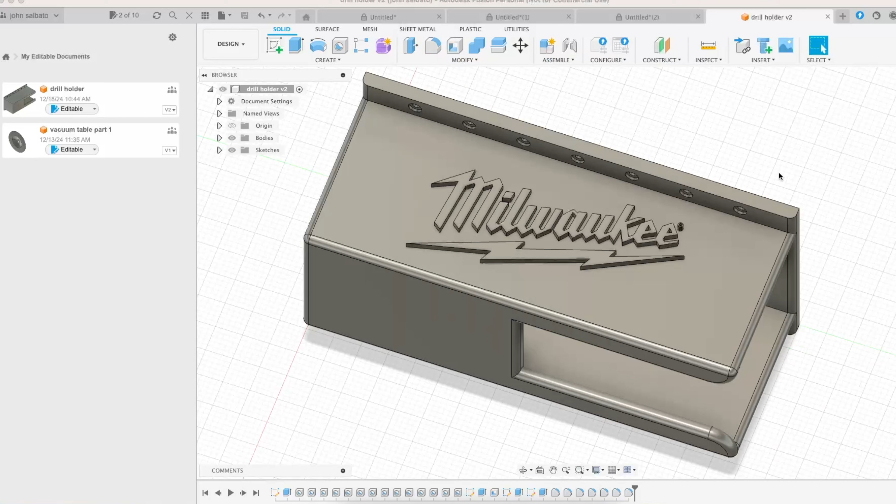Welcome to Outlaw Woodworking. Today we're going to review Bambu Lab's 3D printer. I recently purchased the Bambu Lab X1 Carbon with the AMS, and I'm going to attempt to make a Milwaukee drill holder that you see in this picture right here. We're going to do it using Fusion 360. This video is for entertainment purposes only. I'm not an expert on Fusion 360, but I am going to show you how easy it is to do.

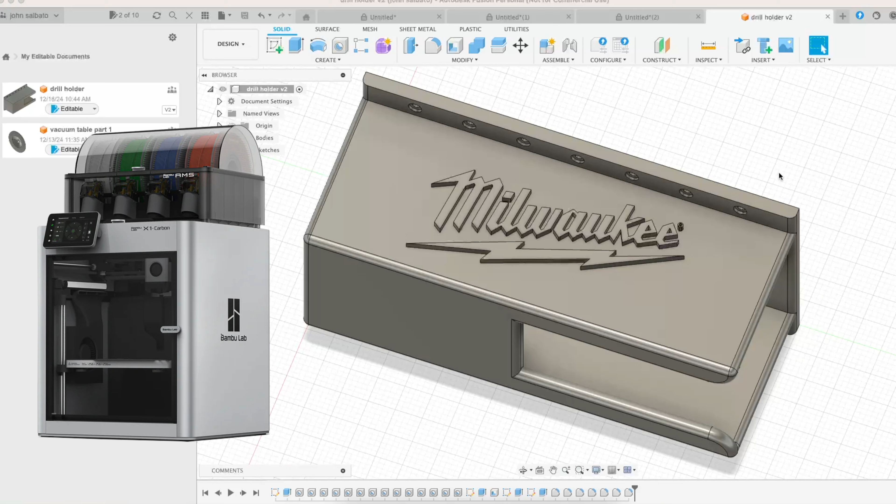So basically I drew this in the morning and printed it in the afternoon, and I'm going to take you through step by step. We'll start off with Fusion 360, drawing it. Then we'll take and save it and bring it into Bambu Studio, slice it, and then send it to the printer. I'll take you along for the ride.

There he goes, it's a working man. He's trying to make a living any way he can. And he'll break his back for a dollar or two. Oh, there ain't no shame in what he do.

Okay, here we are in Fusion 360, and we're going to start our project. We're going to go ahead and go up here, start from the side. The first thing we're going to do is create a rectangle.

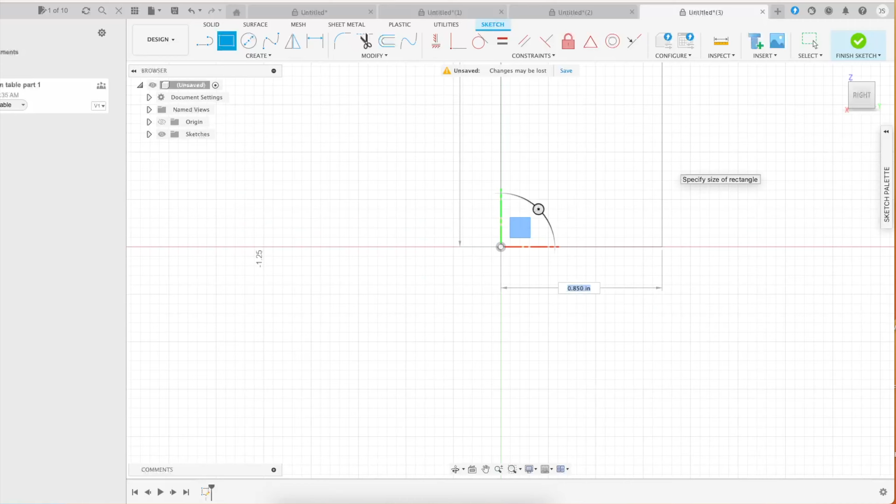I'm going to start right from the center. We're going to go 4 inches, hit tab, and then go 8 inches. Enter. And there's our rectangle. So that's basically the start of our project right here.

Now the first thing we need to do is our holes, because they're the hardest part. So we're going to create a line just so we know where the quarter inch mark is. We'll go down here and create a line at 0.25. Hit enter. There's one line right there.

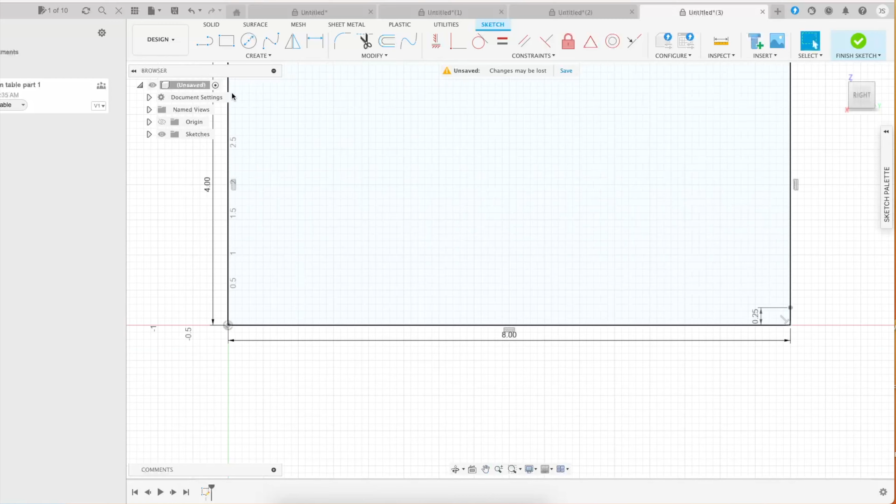Now we know, so we're going to go ahead and create a line all the way across there, right at 0.25. Okay, there's our control line for our first row of holes.

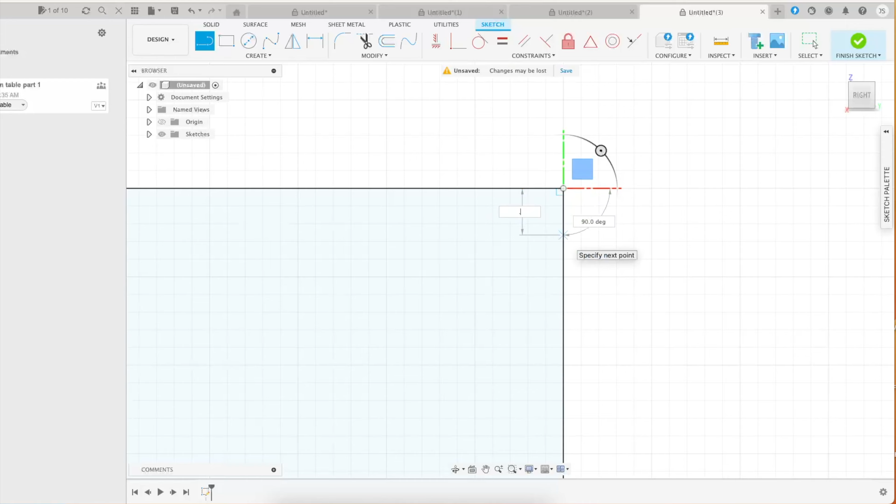We're going to have holes on each side, so we're going to do the same thing up here on this side. We'll go ahead and create a line at 0.25. Hit enter. And then we're going to make a mark all the way across. This will basically tell me where to put these holes at. Okay, there's our two control lines.

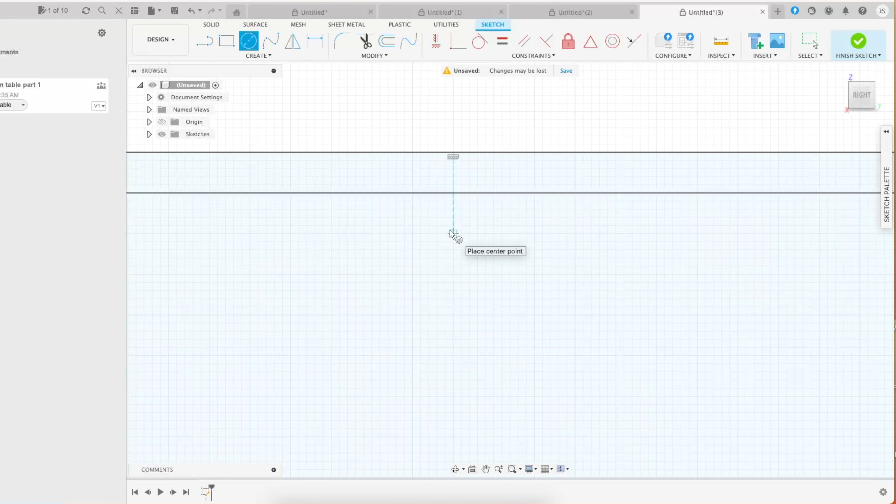Now what we want to do is draw some holes. So we need to draw a hole, and we'll go ahead and start in the center of this thing right here, 0.125, which is 1/8 an inch, and that'll be our first hole.

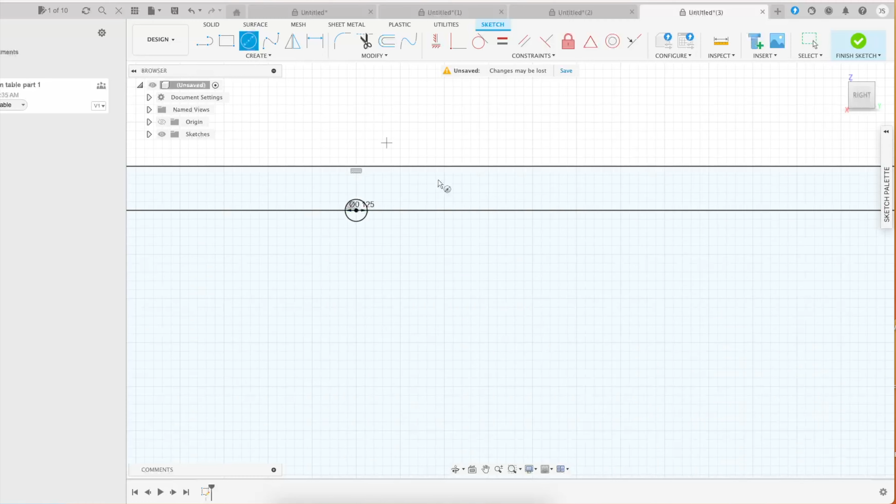Now we're going to do these holes like every... let's see, that's a quarter inch, so half inch. We're going to do them about every inch. So we'll go ahead and put another hole here. Same thing, 0.125. Hit enter. And then we'll go ahead and put another one.

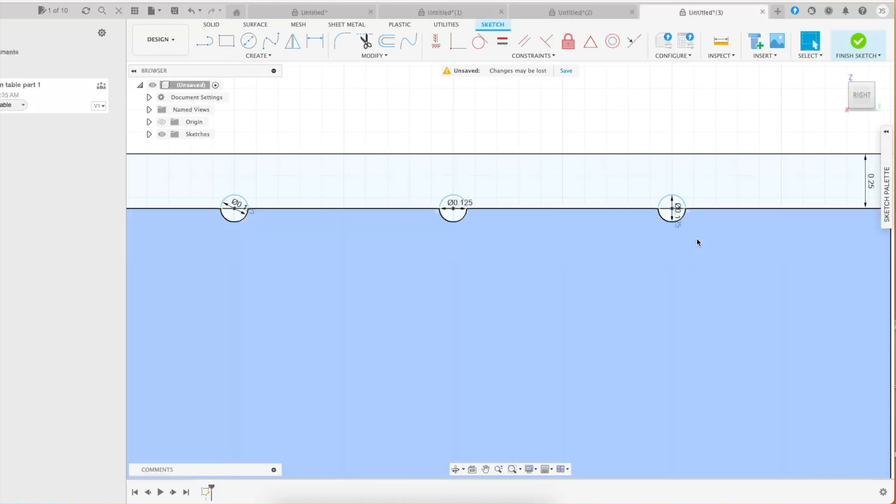Let's see, right there. 0.125. Hit enter. Go ahead and do another one. Let's see, right there. 0.125. Gets a little tedious making these holes actually, the holes are actually the hardest part. Let's see, that's pretty good right there.

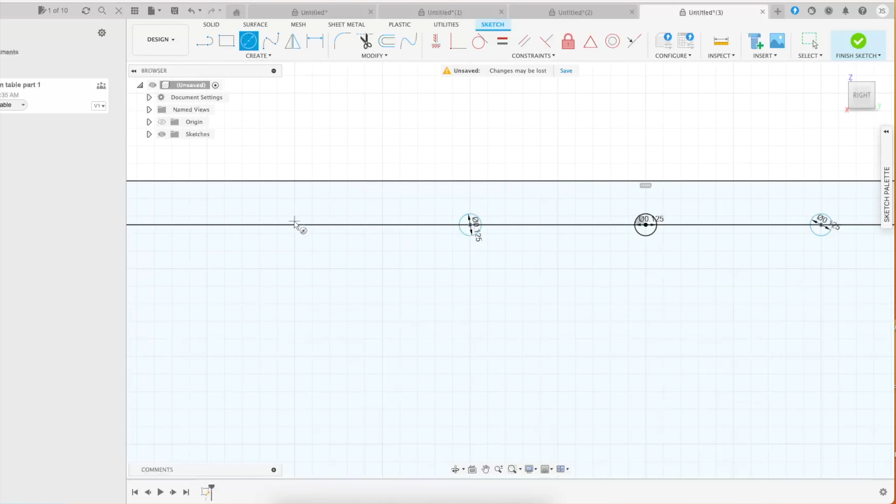So let's go the other way. 0.125. Create another hole. 0.125. And 0.125. Okay.

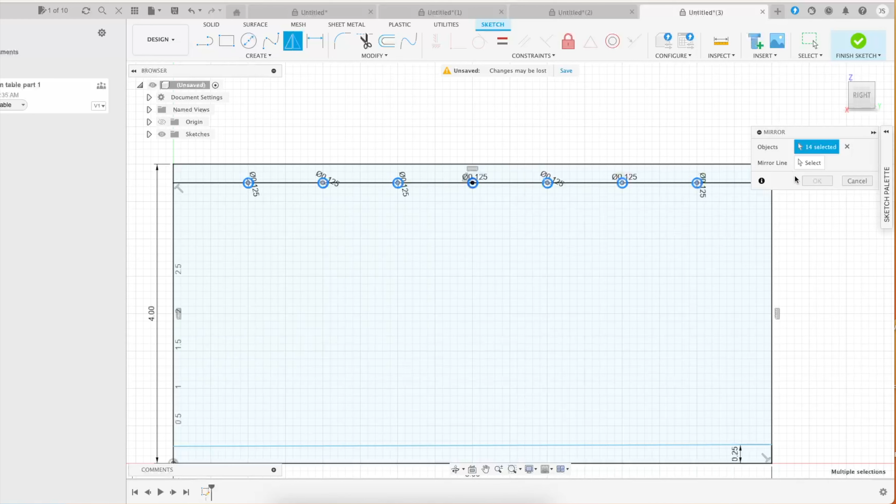Now we should be able to just array this across the thing. So we're going to try that. Let's circle these holes. So we've selected those holes. Now we're going to go up here to mirror. 14 selected. That did not work.

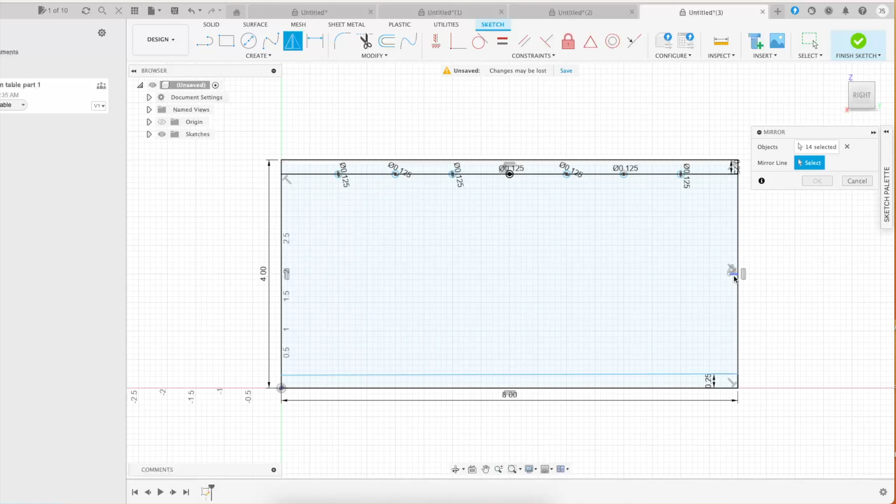So we need a center line before we can do that. So we would go here, pick the center, and now let's select all those holes. Go up here to mirror. 14 selected. Now we're going to select the line. There we go. You can see it mirrored it all on the other side.

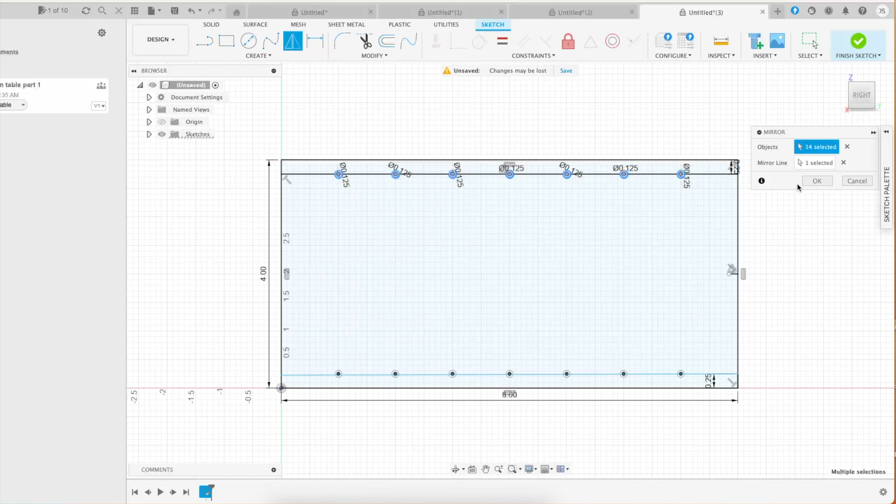Okay, now we're going to, oops, what happened there? Select line, select objects, and hit OK. Okay, now they're all there. Okay, so we have all the holes there.

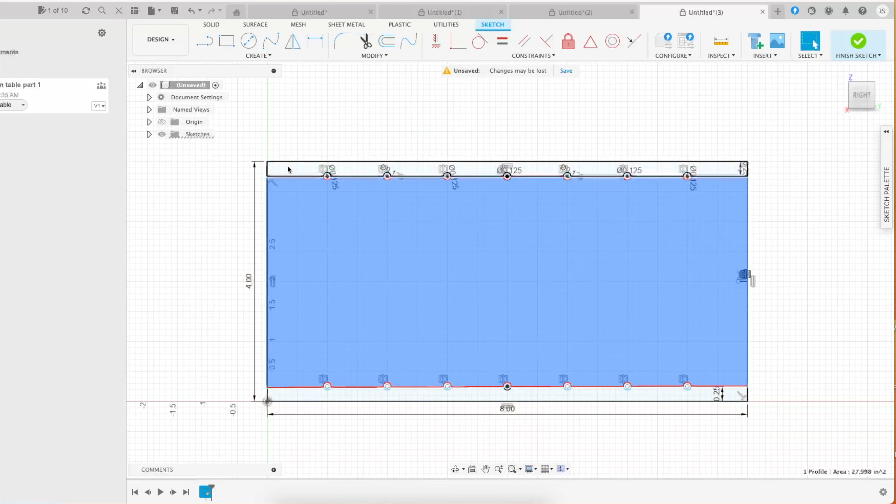Now what we need to do, we're going to extrude this whole thing. Actually, what I want to do is extrude just the base. Let's get rid of this line. Get rid of this line. We're going to get rid of these two control lines. Now we have one solid base.

We're going to go ahead and go up here to solid and extrude. The thickness of our material is 1/4 inch, so we'll put 0.25 and hit OK. So now when we look at this, you can see it's got the holes in it, and that's our whole base at the right thickness.

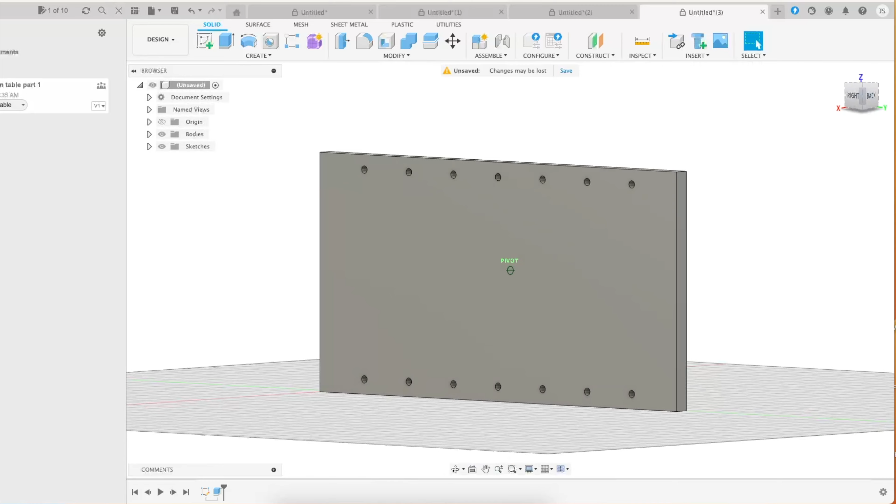Okay, next thing we want to do to these holes is basically, these are in the center of each of these things.

Now what I want to do is multiple holes, but we're going to do this little counterbore. I'm going to select that, and now we're going to do a counterbore on each hole. There's probably an easier way to do it, but this is the way I figured out. I've selected the face right here, I'm going to go up to hole, and I've already got my settings in here - the diameter, the counterbore, it's going to go down 1/4 inch. Now all I need to do is select that right there, and it'll make that counterbore.

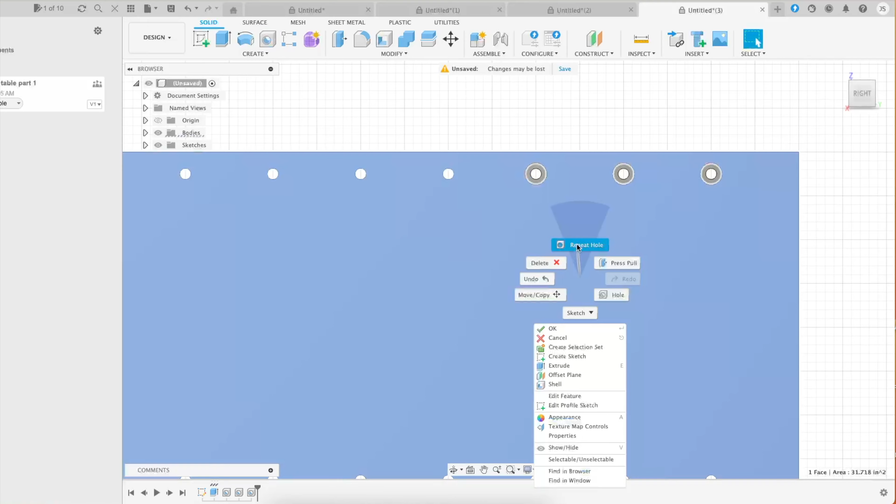The only problem is it doesn't really let me do multiple at each time, so each time I gotta go up here, select it, done, OK, select it, repeat, basically repeating that process. I think there's an easier way to do this, but right now this is the way I've figured it out. For some reason, if I select the face and go up to repeat the hole, if I try to go multiple, it won't let me do it. So I'll just select each one, hit OK, hit the face, and repeat until I get them all selected. That's not that bad, but I know there must be an easier way.

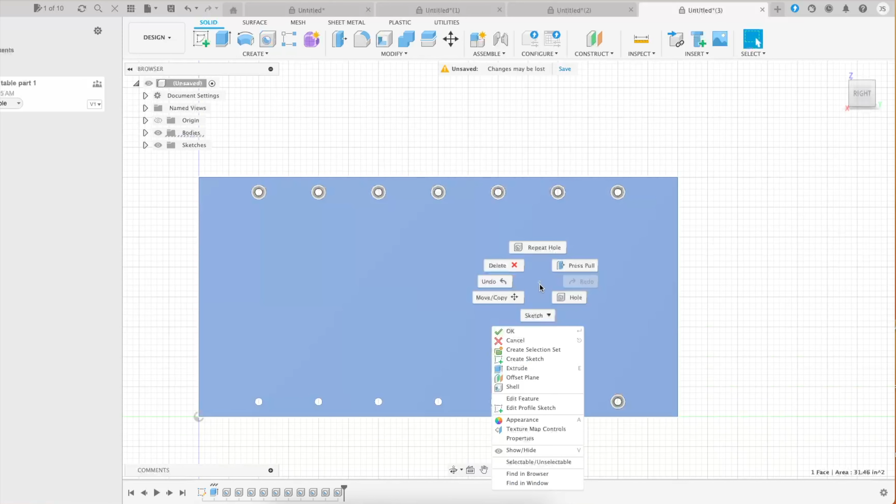Fusion 360 is a little different than the AutoCAD program I used to use. It was pretty easy to make multiple holes there, but I think when you're doing a 3D design, it's a little bit different. Anyway, this is how I figured out how to do this part of it. So I'm just going to click through 3 more holes, and then I'll show you what that looks like.

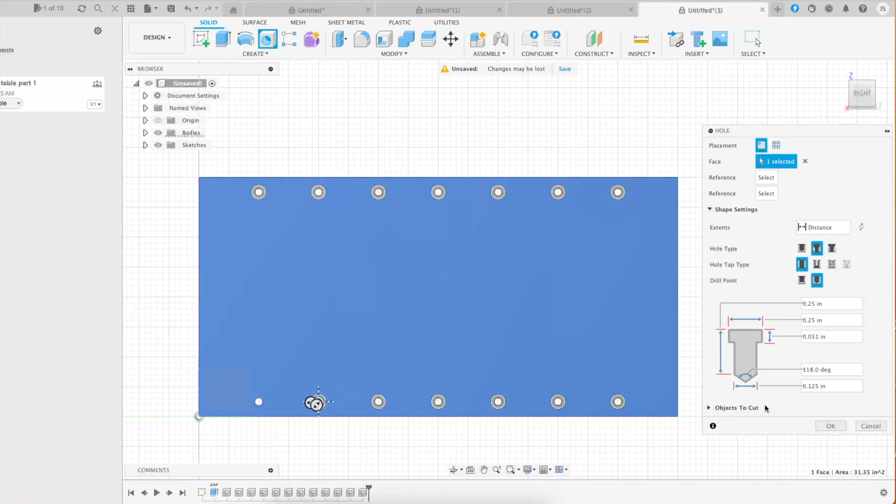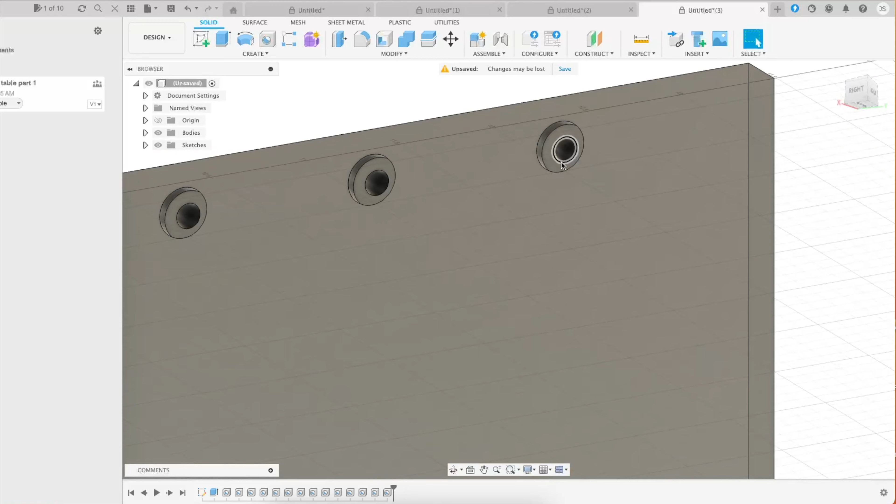One more of these. There, okay, hit OK. Now if you zoom in there, you can see that hole is nicely recessed, so that screw head will fit right in there, and these are all centered where they want to be. Okay, next thing we need to do is build the socket part of this.

What we're going to do is go ahead and create a sketch. We're going to be on top of this face, and we're going to go a half inch in. So we'll go ahead and put 0.5, enter, and then from there we're going to go straight across.

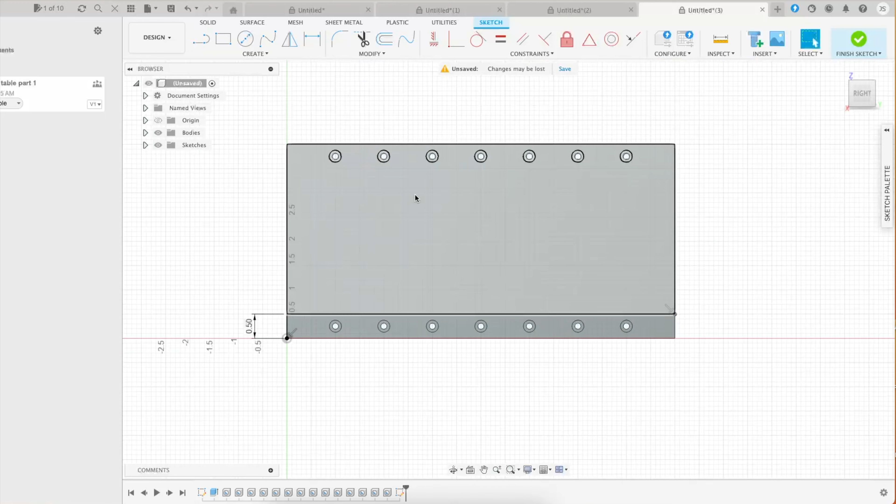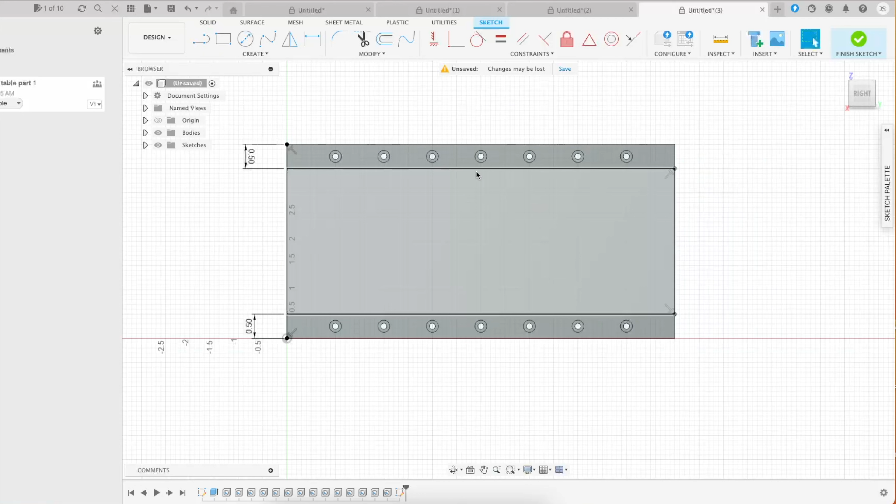Then we're going to do the same thing on the other side, 0.5, and create another line there. Okay, now that should have separated those two, so this is the base of it. We're going to go ahead and select this, and this is going to be 3 inches tall. We're going to extrude this, and I'll show you how simple this is. Go over here, distance 3 inches, hit OK, and now you can see there's the body of it.

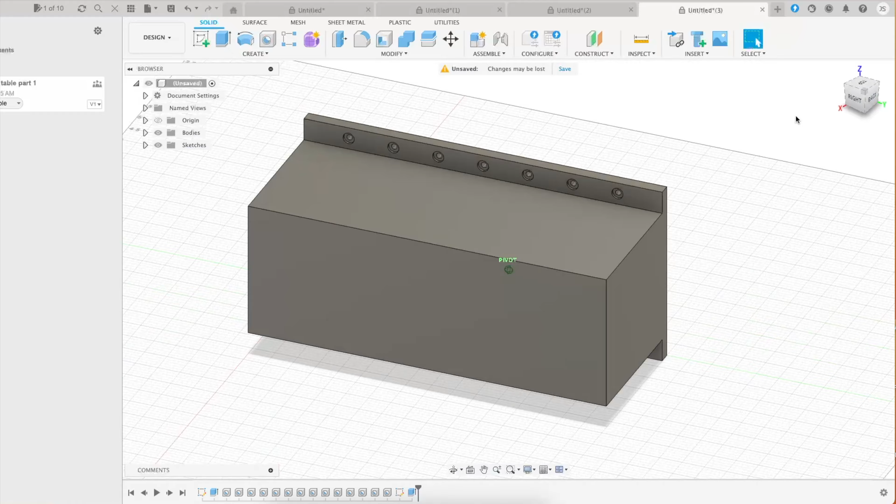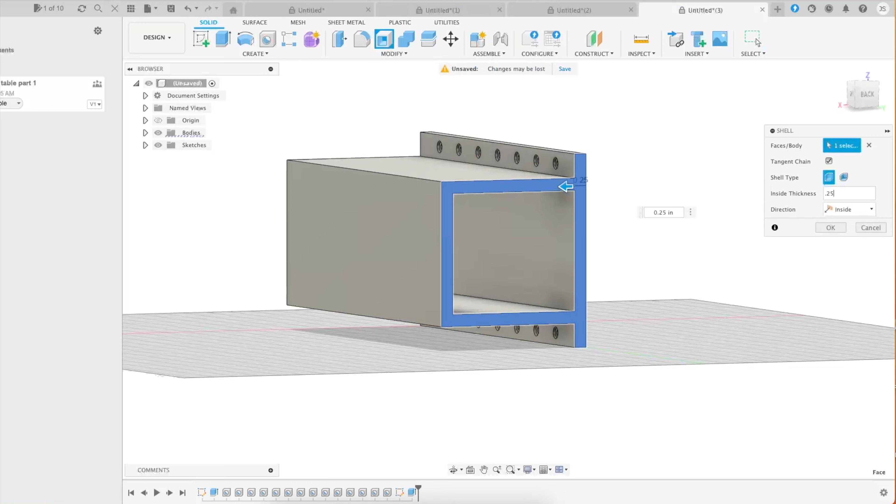Of course, right now that's a solid block, and we don't really want a solid block there. So we're going to highlight this part, and we want to go up here and shell this, and we want the inside thickness to be 1/4 inch. So we'll type .25, and there we go. Okay, so now you can see it has a back and it's all hollowed right there. Perfect, now let's rotate this around a little bit.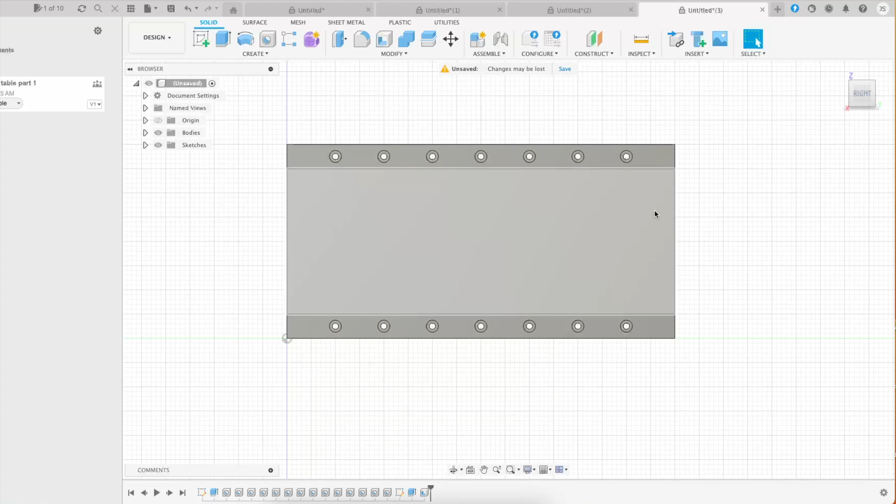Okay, now on this face right here, what we want to do is cut out a section. So we're going to go up to line. We already know this is 3 inches, that's a 3 by 8. And what we need to do, we need to take 1 3/4 inches out of there, so that's basically the halfway mark - 1 3/4 inches.

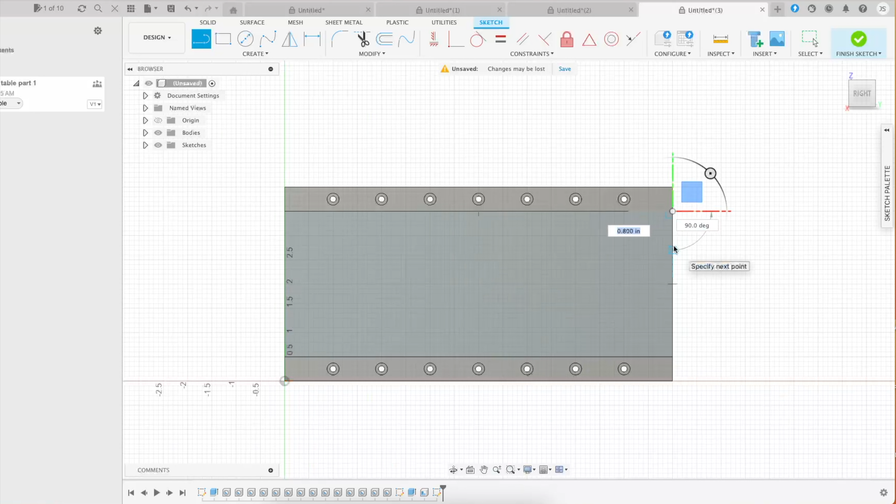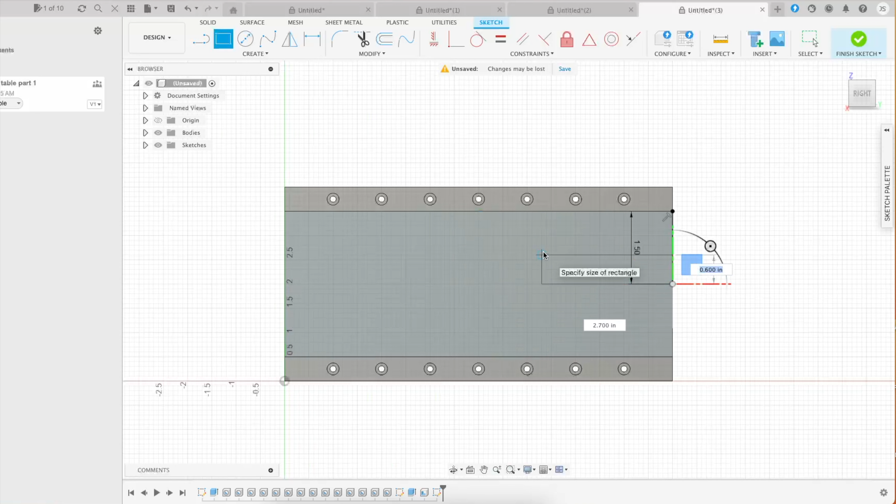So let's go ahead and go to the center. It's 3 inches, let's go 1.5, and there's our center mark right there. Now what we're going to do is create a rectangle from the center. We'll basically do 2, so the inside cut that we need to make is 1 3/4 inches. So 1 3/4 inches divided by 2 is 0.875.

So we'll go ahead and type 0.875 and hit enter. So that's half of our rectangle right there, but we didn't do the length properly.

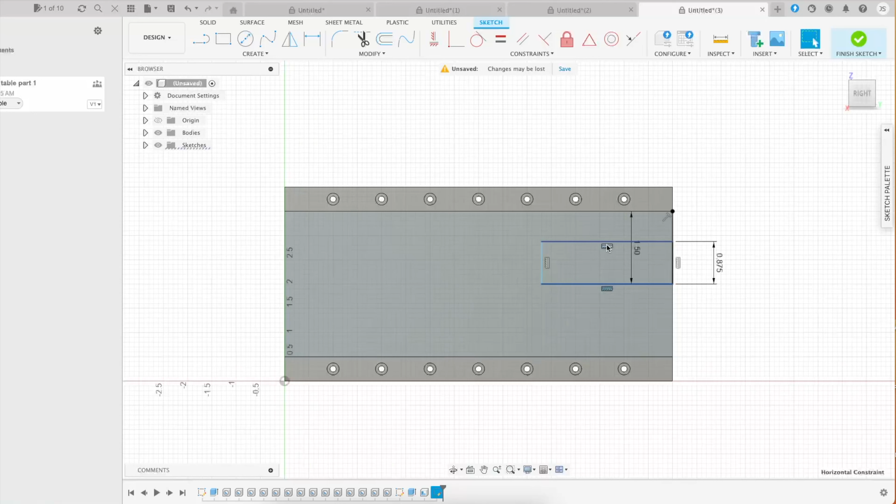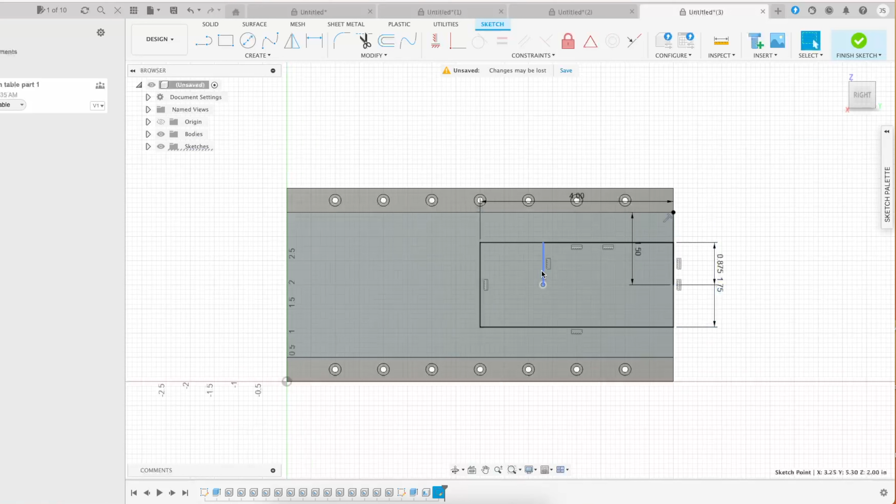So let's create another rectangle from that point, and we'll put 1.75, hit tab, then 4 inches, tab. So there's our actual rectangle. Now we can get rid of this other one, and we can get rid of this control line. Okay, we got another control line right here, let's get rid of that. And there's our box. Now what we want to do, we want to cut this out.

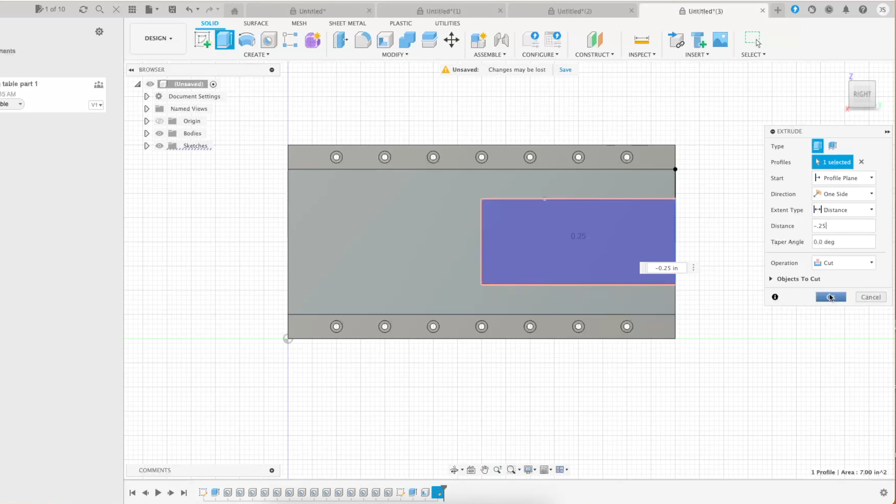So we're going to go up here to hit solid and then extrude. We're going to go the opposite direction, but we're going to cut. We'll put negative 0.25, and that should cut that out. So if we were to look at it, there it is, cut out.

This part is a lot simpler than the holes. The holes take the longest to do.

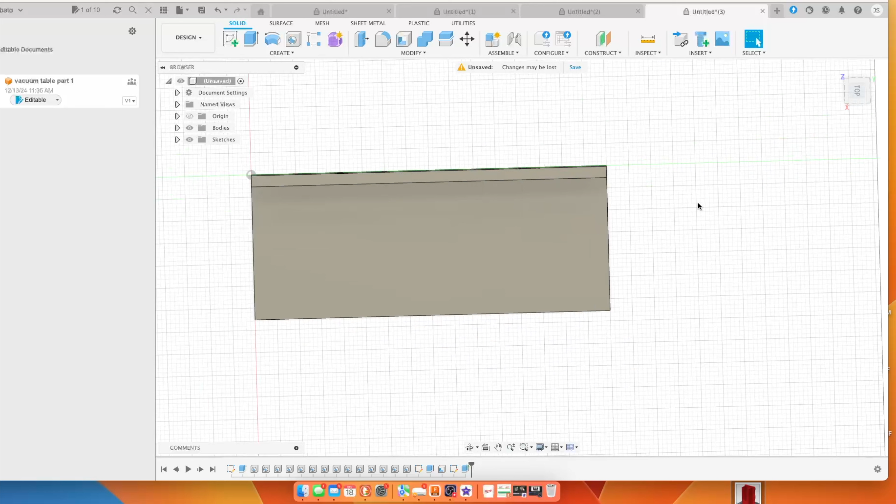Okay, the next thing we want to do, we kind of want to put a little bit of detail on this thing to make it a little more unique. So we're going to go up here to insert, down here to SVG, and we're going to go in here from my computer. We're going to grab this Milwaukee SVG logo and see where it came in at.

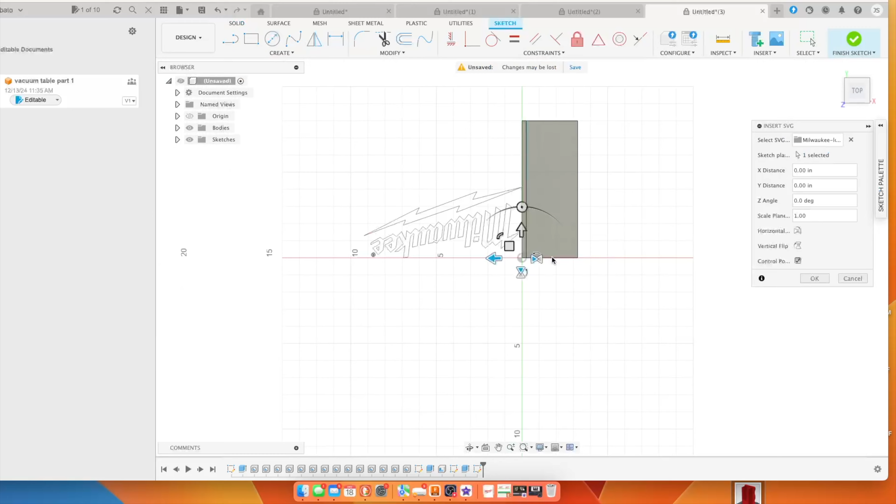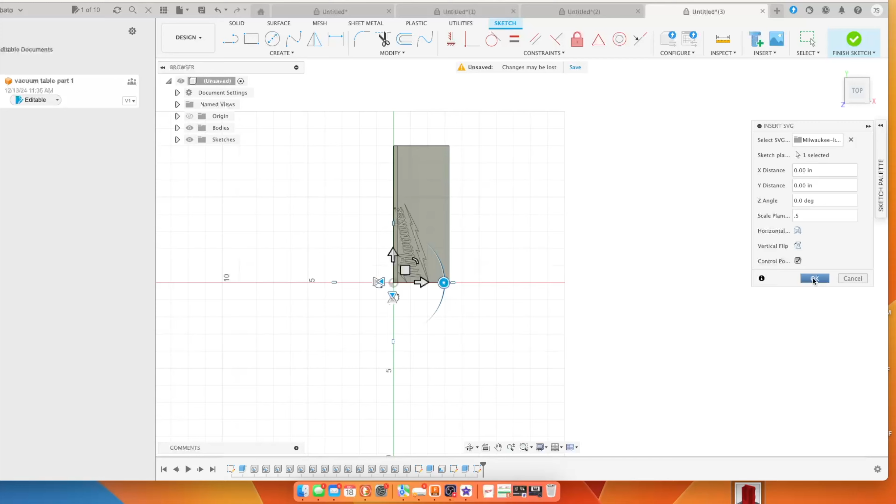And there it is. Now what we want to do, we want to rotate this thing to there, right there. And we also want to scale this down. We're going to go over here to scale plane, and we're going to put 0.5, about half the size of what it was. And we're going to move that. We'll go ahead and hit OK. So there it is right there.

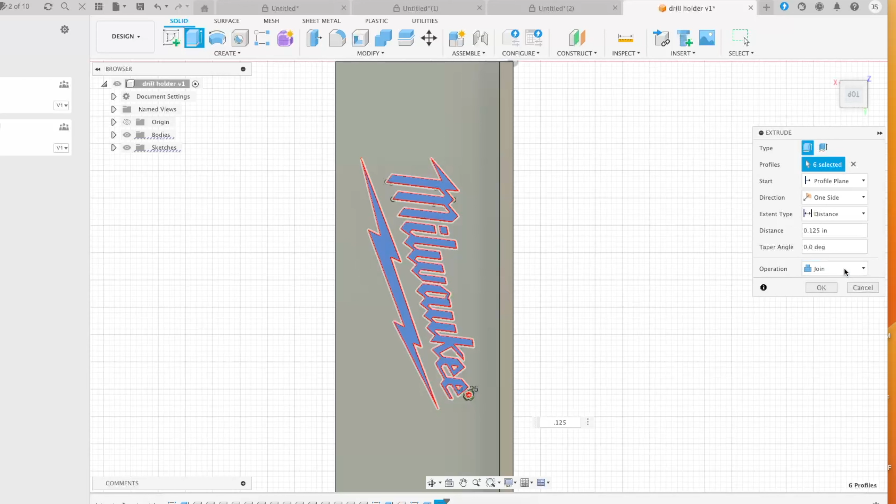Okay, once we have it where we want it, we're going to extrude it. We've got it all selected. We're going to extrude it 1/8 of an inch, so 0.125. We'll go ahead and hit OK. Now if we were to rotate this, we should be sticking out. And there it is, so it's sticking out right where we want it.

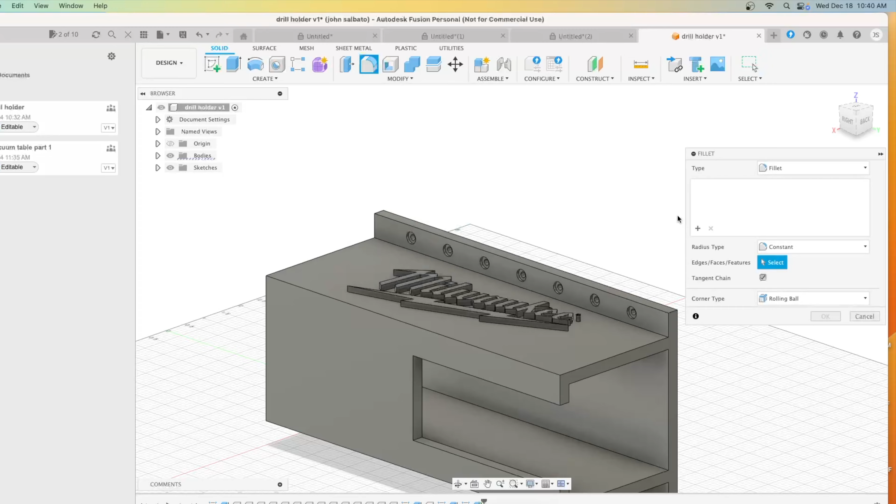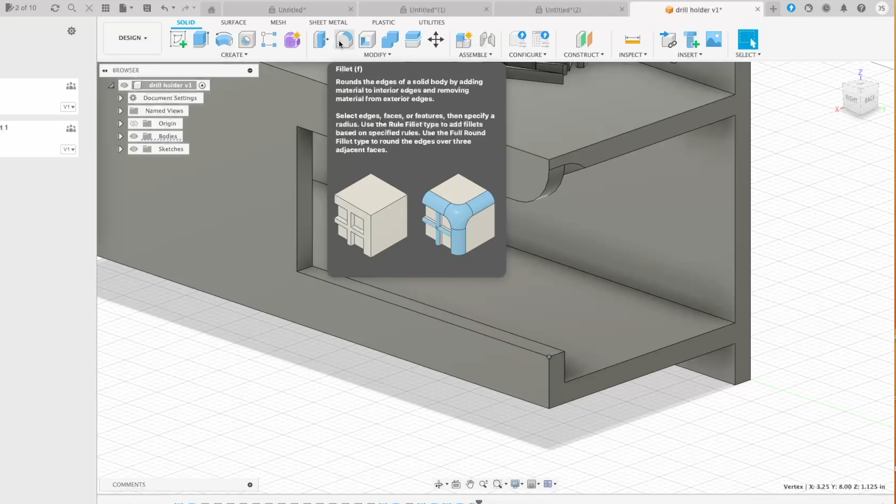Okay, there's some other little details that we can do to this. One of the things we can do is we can curve a few of these edges. So we'll go up here to fillet, and we're going to do about half an inch, 0.5. You can see how it radiused that right there. Now we're going to do multiples, hit OK, and we're going to repeat that fillet command, and do half an inch again. Hit OK. So there you can see we've kind of radiused those two where the drill goes in.

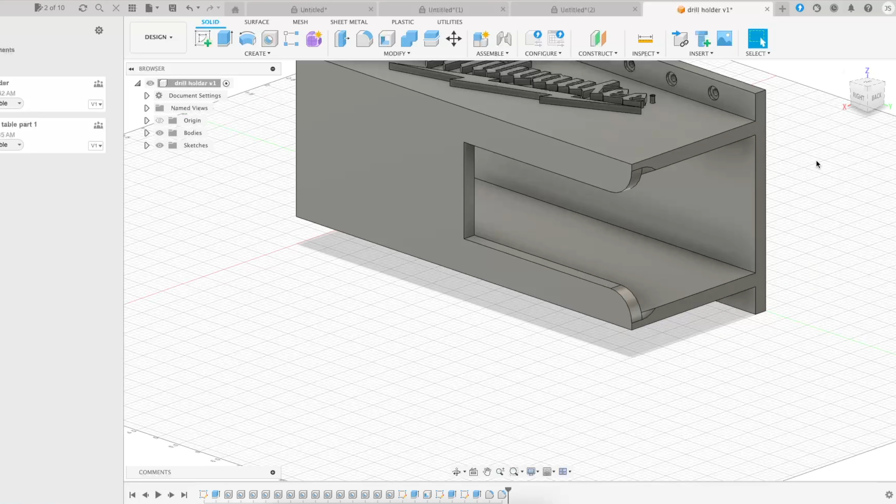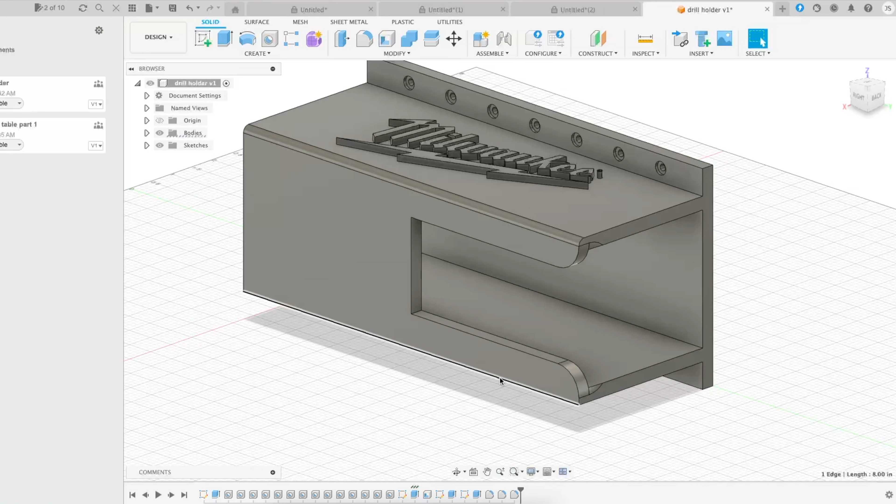Now what we could do, we could round off a lot of these corners to make it even nicer, so I think we will do that. We're going to select this, go ahead and fillet. We'll do a small one, they're 1/4 inch, so let's do 0.125, we'll do 1/8 inch. And you can see how it radiused that right there. We'll hit OK, and we're going to do this outside one over here too, 0.125. So we've got those two outside ones radiused.

Now to make it look good, we're going to go ahead and do this one over here too, same thing, 0.125. Now if you look, we've got all these sides filleted right there.

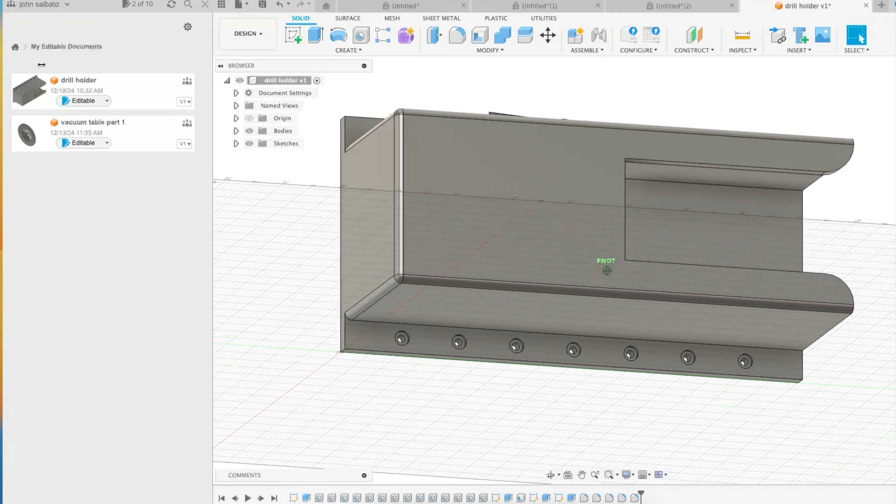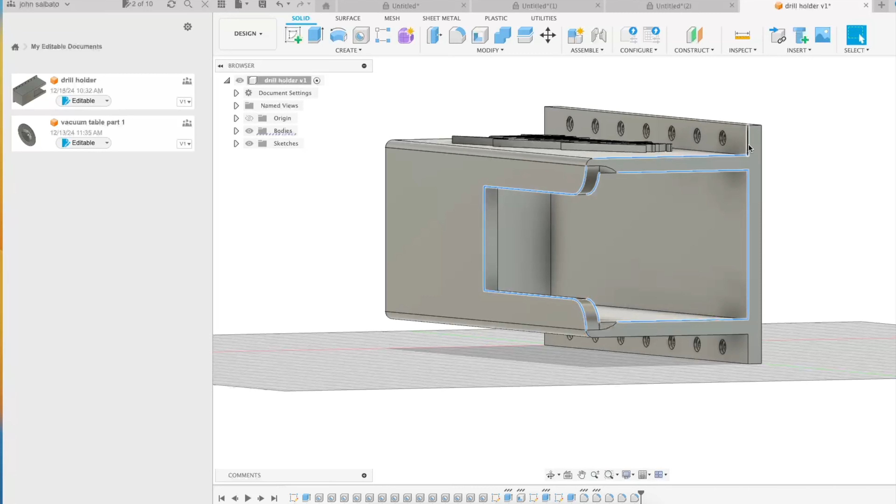Now I think it would be cool to do these inside corners too. So we're going to hit this one, this one, this one, that one, that one, that one, that one. And let's fillet it, see how far that goes, 0.125. Hit OK. So you can see it kind of rounded out everything really nice like that.

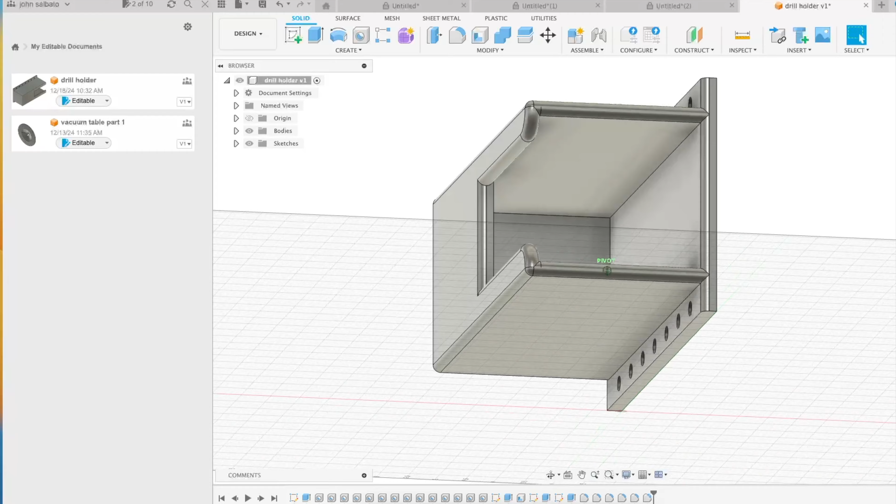And we've got a couple more. I'm not going to do the outside edges, but I am going to do this piece right here. Hold the shift key, that piece. And we'll go 0.125.

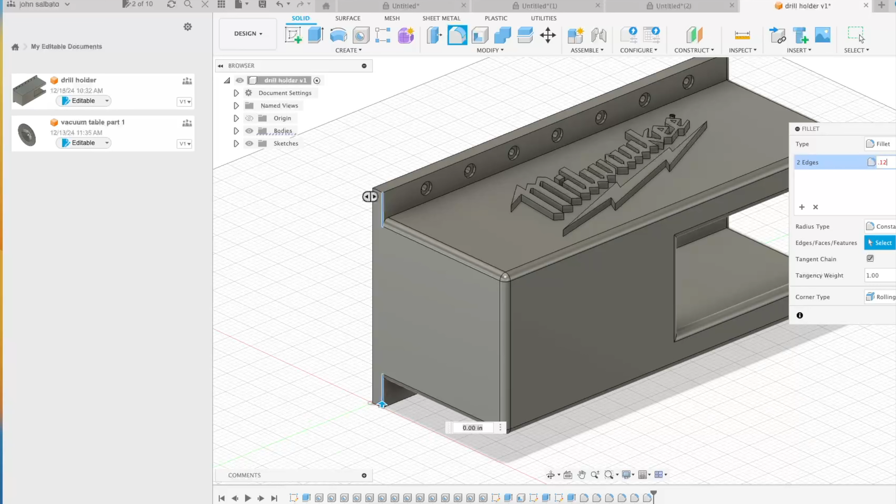Okay, that is our drill holder. And you can see it came out pretty nice. Got the holes, everything, that looks really good.

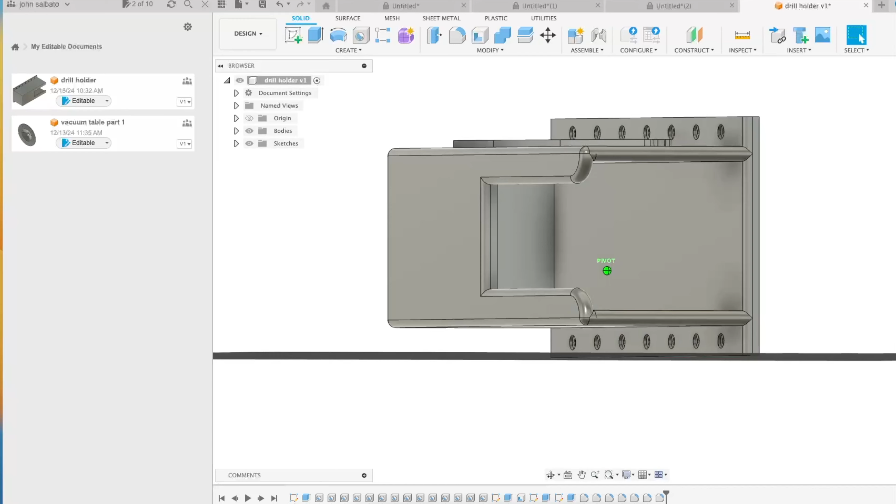Okay, next up we need to save this and export it to our Bambu. So what I'm going to do is I'm going to go up here, I'm going to hit save. So I'm going to walk you through how to make this. Right here, I'm going to hit save, save. Now I'm going to go up here to File, Export.

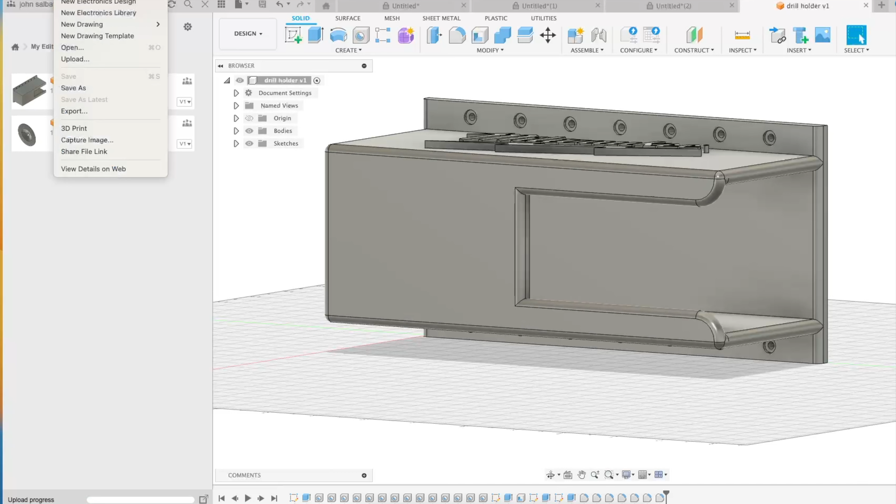Drill Holder, Autodesk. Now we need to export this as an STL. So you go down here to STL, hit STL, and we're going to put it on the desktop so it's easy for me to find. It's called Drill Holder, and we'll go ahead and export.

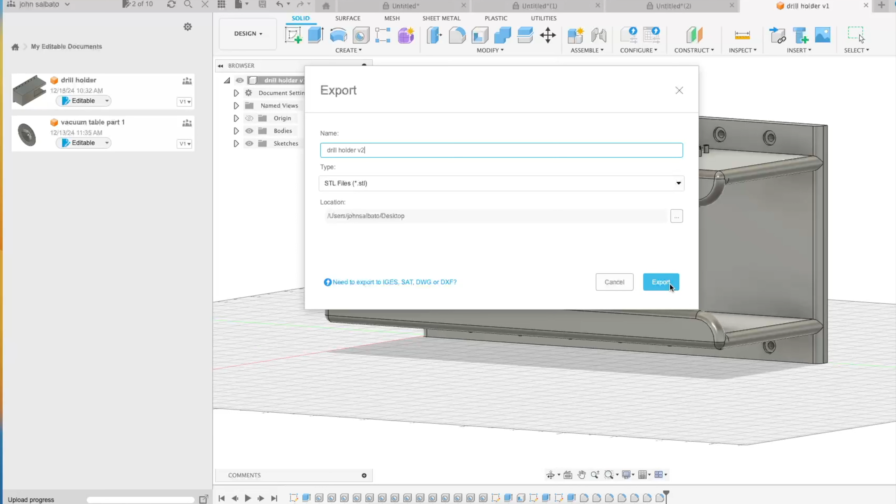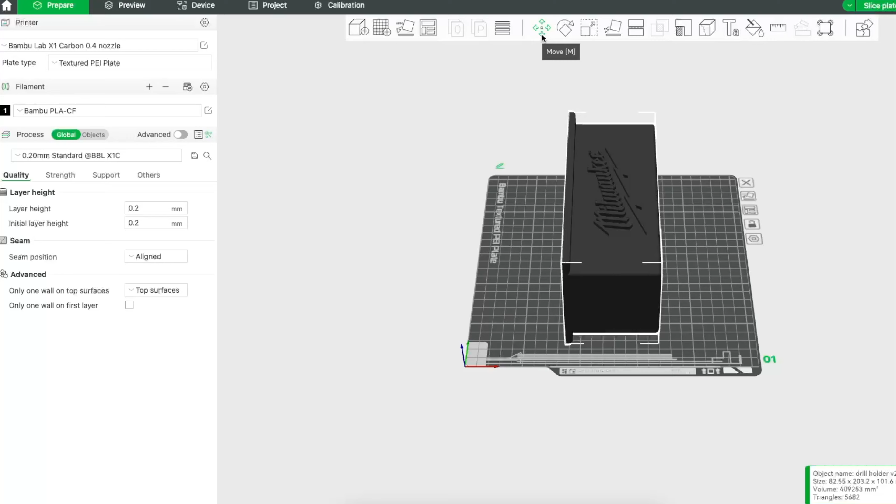So I'm going to go create a new project. I'm going to grab the drill holder right here and place it in there. Now what we need to do, so now you're in Bambu Studio. Now we need to rotate this thing and make it so it's printable, and we want it to be on the base right here. So what I'm going to do, I'm going to highlight it, and then you can basically, let's see, I want to rotate it on the red.

So we're going to go ahead, rotate, let's undo that. We need to find rotate. So file, undo what we just did. Okay, now what we need to do is go over here to the axis and type in 90 degrees.

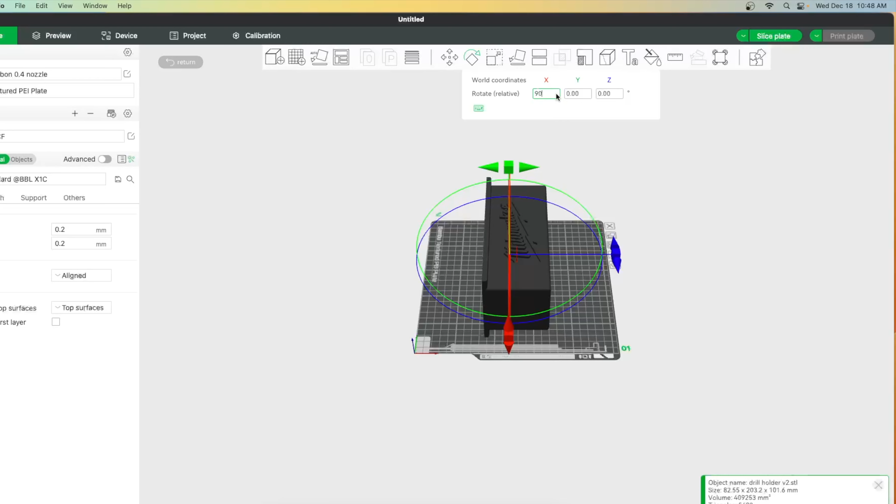And there, we're right where we want to be. Okay, let's exit out of that. And actually, that's perfect where we want to be.

Now we need to do a few more things before we can send this to the printer. Right now it's facing up, so we need to go over here. We have the Bambu Lab X1 Carbon printer with a 0.4 nozzle, and it has a textured PEI plate, so that's right. Now we want to change the filament.

We're going to use Bambu PLA Basic, and now we'll hit supports. Actually, I don't know if it needs any. No, it doesn't need any supports. Let's check the layer height—all that looks good.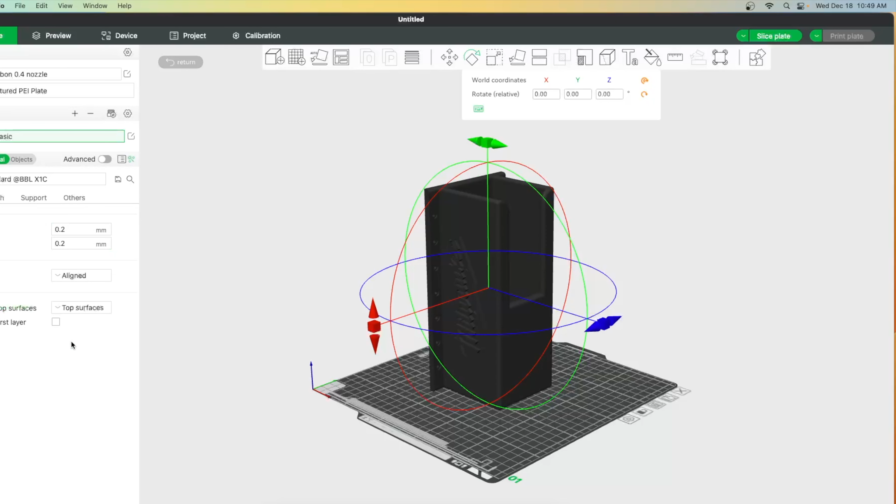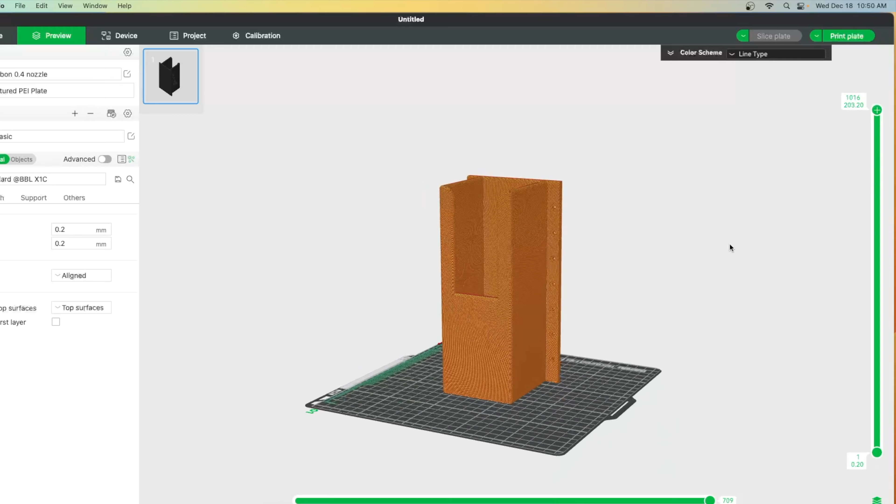So we're gonna go ahead and slice it and see what happens. Different types of supports—if we go ahead, we'll eliminate that. We'll go through the slicer and it'll show you everything it's going to do. This one's pretty basically easy; it doesn't really need any supports.

The Milwaukee thing's only an eighth inch, so it shouldn't need any of those supports at all. Okay, now color scheme—I want this to be red.

Is there a preview? That's the preview. Device, prepare, project, preview. Okay, I think this is ready to go to the printer.

So let's go ahead and go over to the printer, and I'll do a time lapse of this, and we're going to print it in red. Hopefully we can just select red on the printer, and that should work. Let's go over here to print.

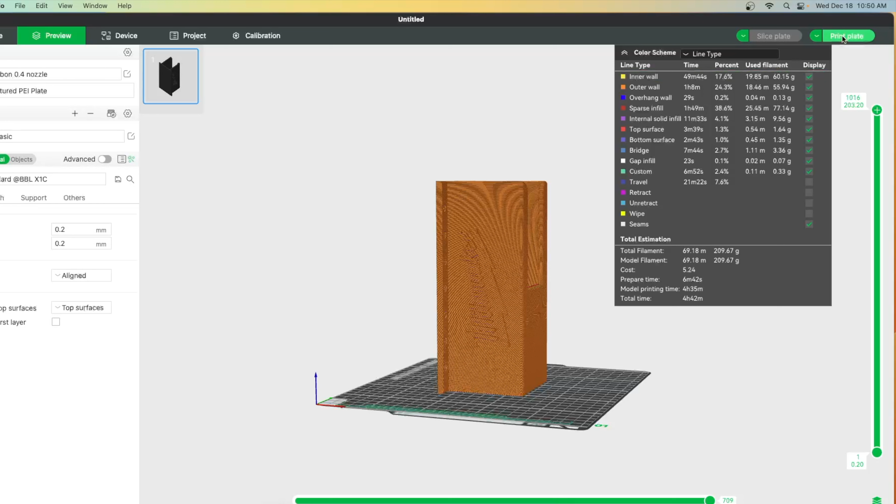And it shows—now here's where we can select the color, I think. This says PLA, but it doesn't have the color. It says Outlaw Printer. Click here if you can't connect.

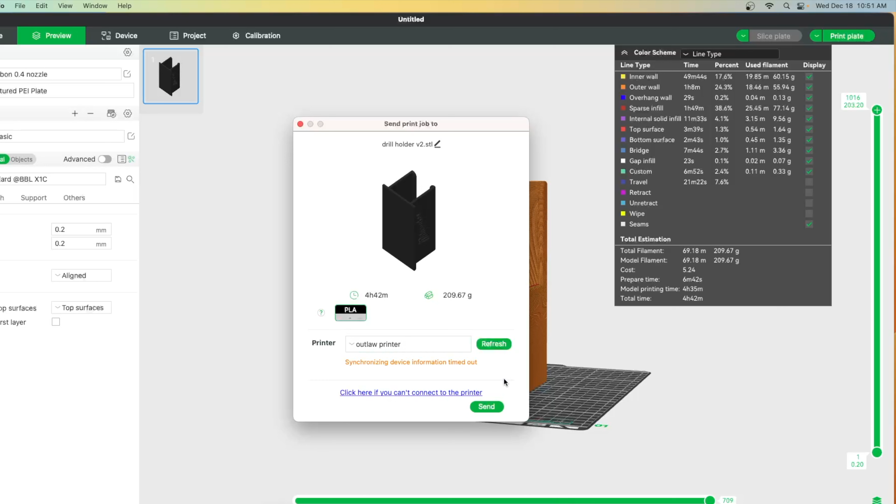So this will be when we send it to the printer. I'm going to go ahead and turn on the printer and get this thing ready to go. I'll see you over at the printer.

Here you can see it's preheating the bed. It's at 0%, all loaded. It's got the red filament loaded, ready to go—it's a PLA Plus red by eSun. And when it starts doing anything, it'll automatically start recording a time lapse.

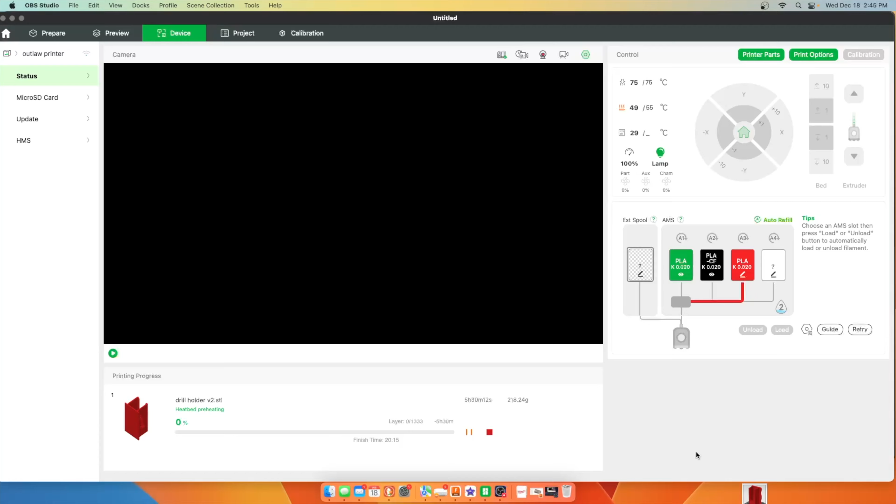It is going to take about 5 hours and 30 minutes, so we'll see what happens. And here you can see the time lapse—this is 5 hours and 30 minutes, I believe, to make this thing.

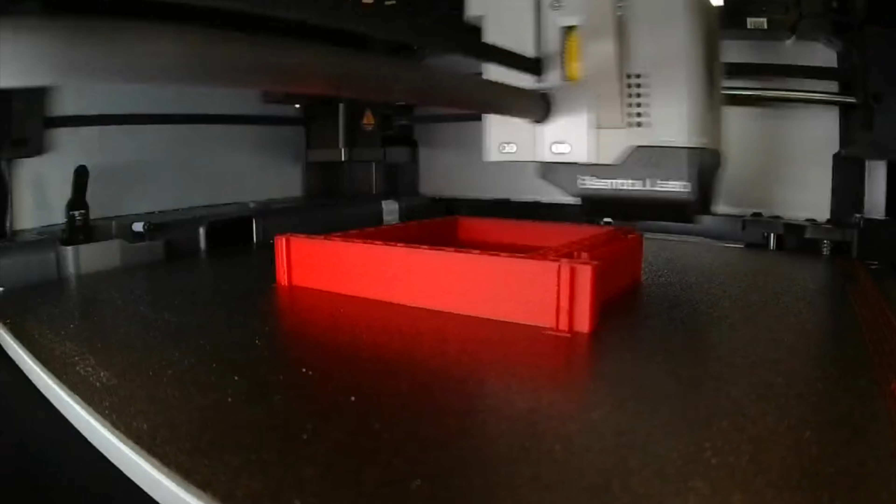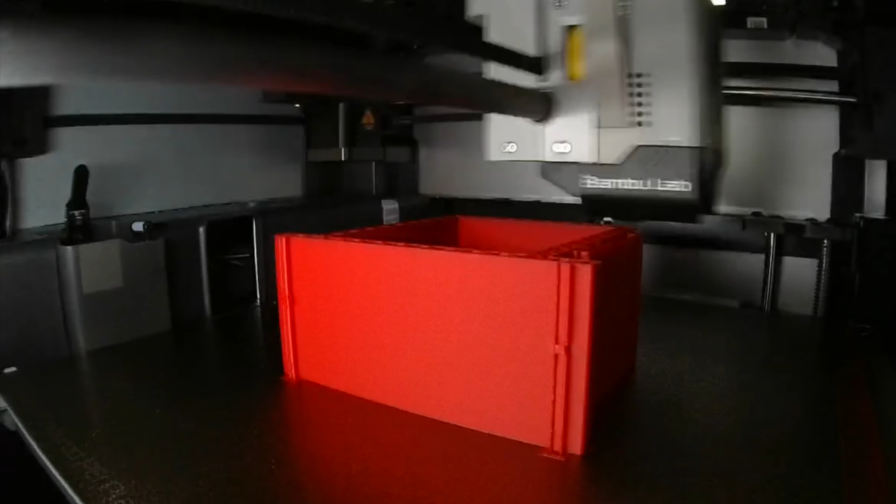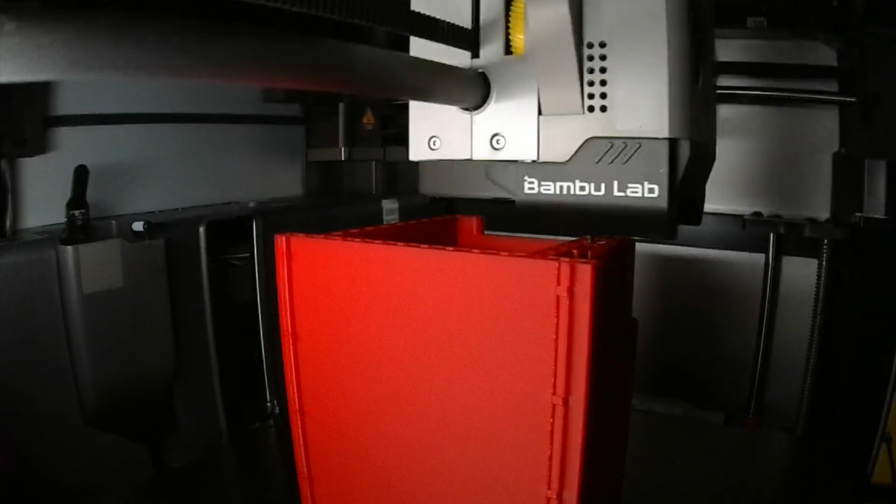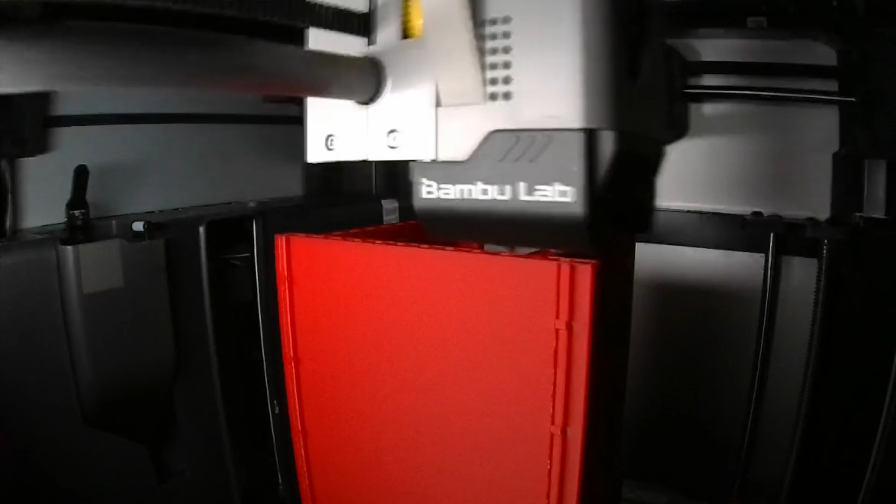Now, one thing—if I need to make about 5 more of these, one thing I probably won't do is print the raised Milwaukee letters on the side. Even though they look real cool, and I'll show you after this gets done printing what they look like, because of the supports that get printed on the side to hold up the letters as it's printing, it makes it hard to get the supports out in between the letters. So I think if you're going to do any raised letters, you should plan on them being flat so it doesn't require any supports to make them.

And right here you can see it's finishing up, and that's the end of it. There you can see the raised letters, and they were hard to clean out in between—cleaning out the support. There you can see it all came out really nice, actually.

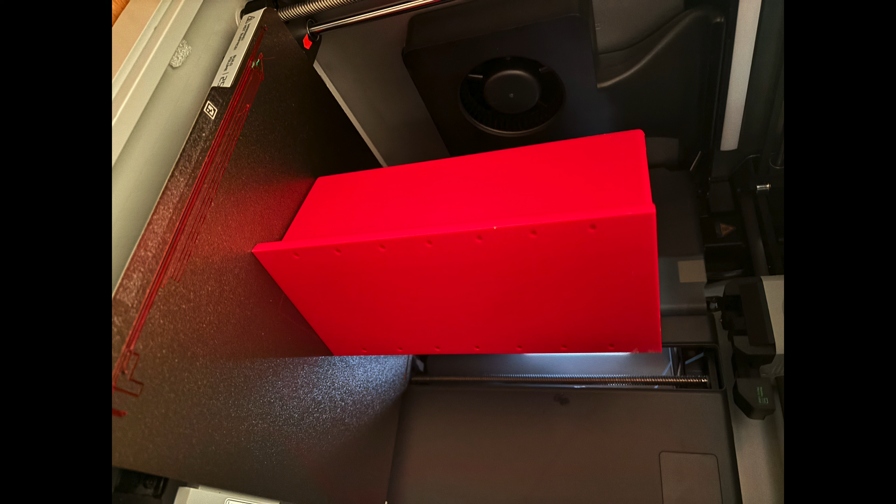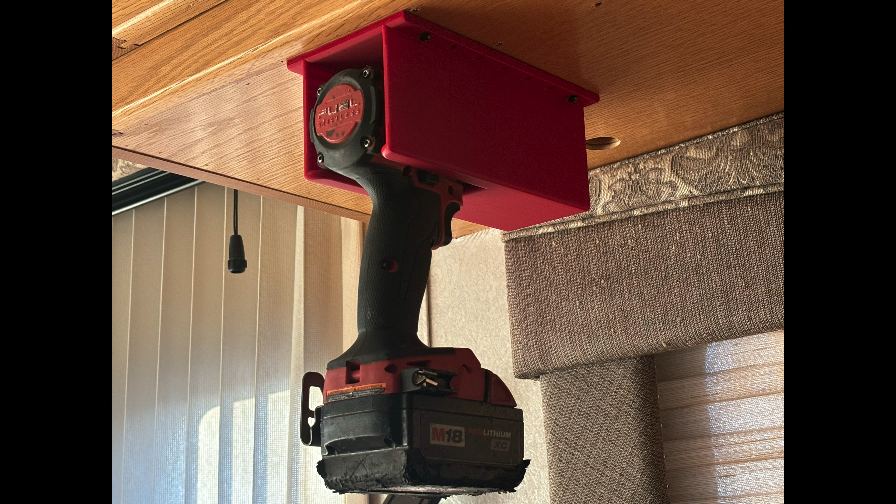This is the third thing that I've printed on the Bambu Lab X1 Carbon, and all 3 items I printed came out perfect. I didn't have any hiccups, and there you can see it up on the wall.